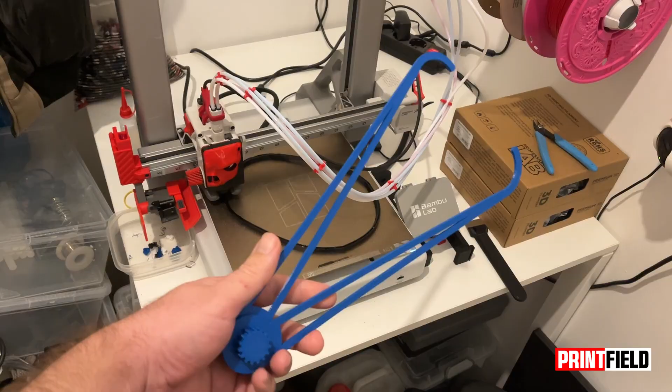Here is what to do if you're having problems scaling helmets. First, you will need an outside caliper. You can download my design from MakerWorld, link in the description. You can print it out fast and easy.

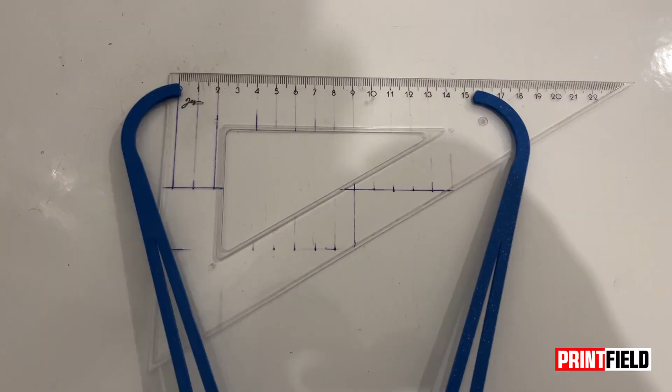With the caliper, you can measure your head dimensions. Simply open the caliper to see the width of your head, then carefully remove the caliper. Now we have the width of our head. With any kind of measuring instrument, simply measure the width that the caliper holds. My head's width is around 157 millimeters.

The next step is to download a dummy head. On MakerWorld, you will find a user called Budwin. At the user's files, you can find a dummy head pack. The pack has a few heads with different sizes. It doesn't matter, just pick one and download it.

After you downloaded the dummy head, load it into Bambu Studio. You will see a head like this. Click on the head to set it active, then click on the measure tool.

Now we are going to resize the dummy head how we measured our head with the outside caliper. We need to put down 2 points on the head. Try to find the same spot on both sides. I'm using the ear and the eyebrow as reference.

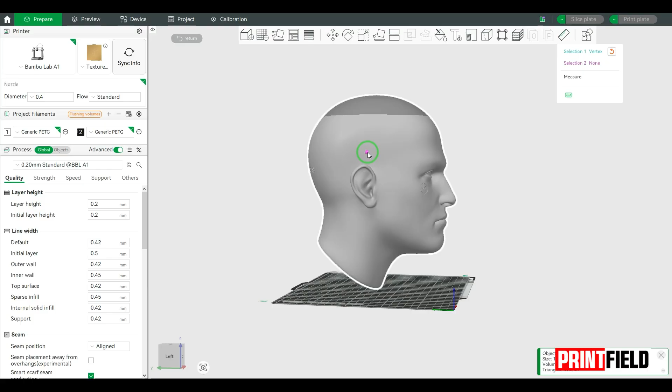Now you can see the actual size of the dummy head. What is gold in Bambu Studio is that you can change the size. Just simply click on the edit button and type in your head size that you measured. I measured 157 millimeters, type it in and press enter. The head will be scaled up to the size. Great, huh?

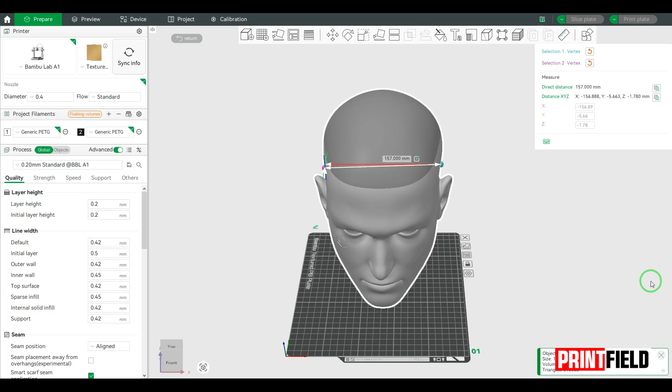Now the fun part. Drop in the helmet you want to resize to the perfect size. I always wanted a Batman helmet, so I will show you with this one.

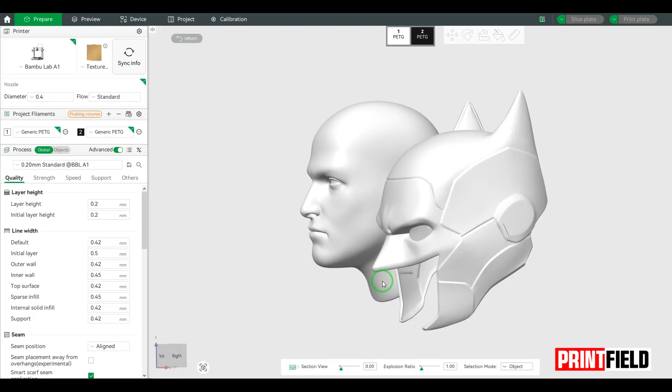There is an assembly view where we can move the objects easily. Click on that. We have the head in our size now. We need to move and scale the helmet to fit well on our head. Click on the helmet, then move it to the dummy head, how we want to wear it when it's printed out.

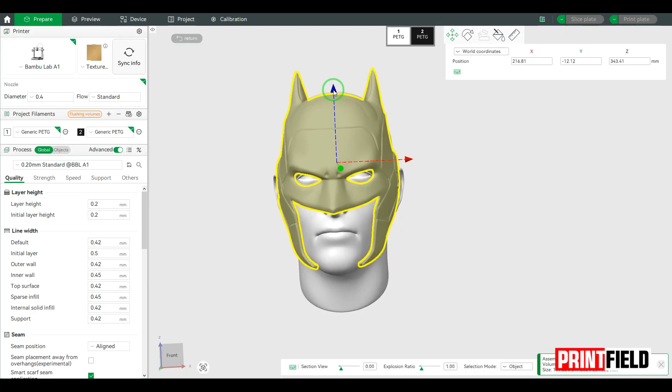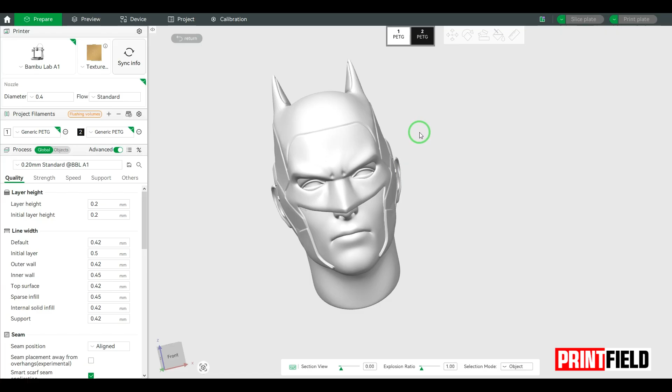In my case, as you can see, the dummy head is bigger than the helmet. The ears and the back of the dummy head are out from the helmet, so we need to scale it up. The nose is out and the chin is tight too. Press return and let's scale it up.

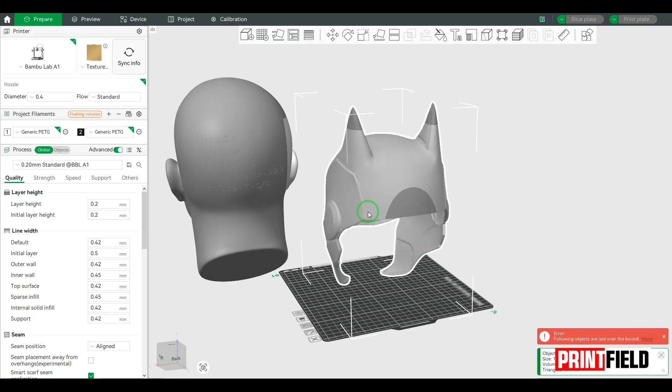You can put away the dummy head. Press the helmet to set it active, then we are going to use the measure tool again. On the same spots, click on both sides and we can see the actual size of the helmet that we can set.

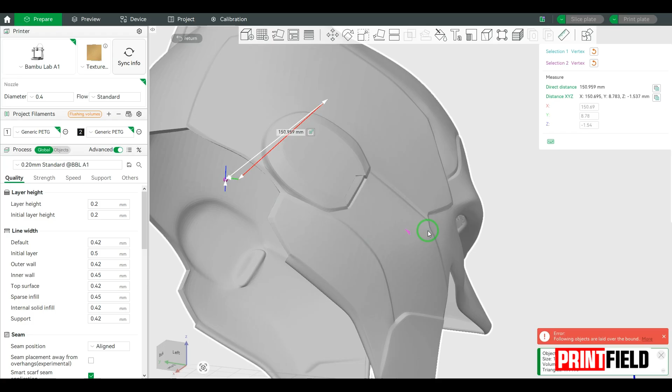In this case, it's way lower than it should be, so with the same process, edit the number. Give it a bigger size than your head size. If you want to put in foam or other materials, you might calculate those in too.

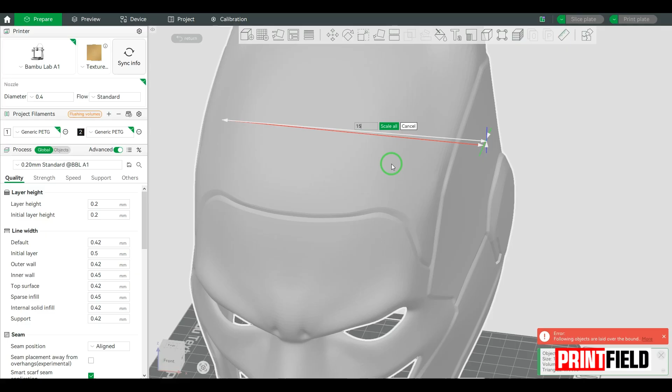The shape of any helmet can be different from your head shape, so we need to go back to the assembly view and we can see live how it would fit with the upscale. Now it looks much better, but still not perfect. We still need to scale a bit.

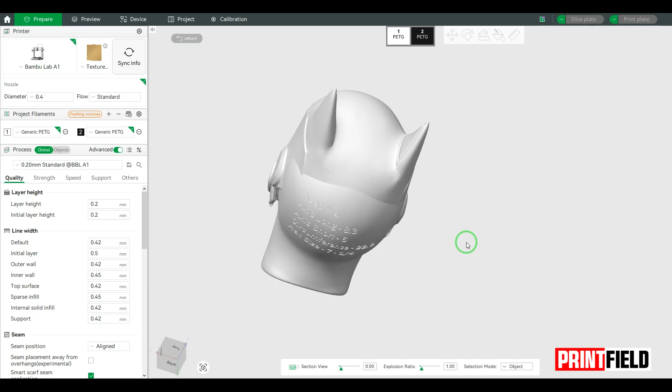So press return, then press the scale button. You can see that we are now at 5% up. And from now it's playtime with the percentages to make it perfect.

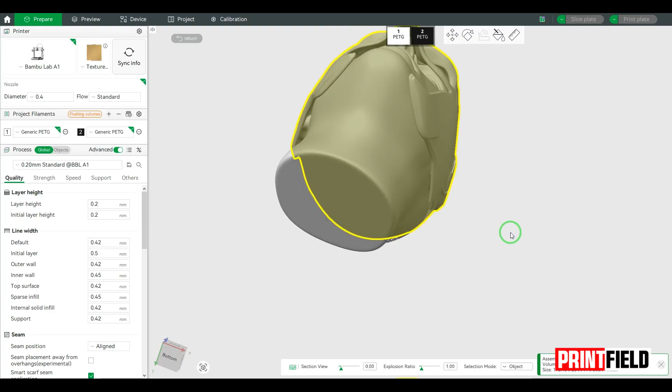After we gave in the bigger size, we go back to the assembly mode to check the fit to the head. It's bigger, but still not good. Let's give it a bigger scale.

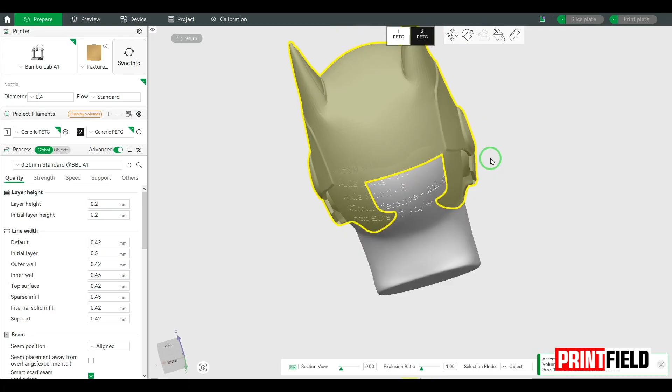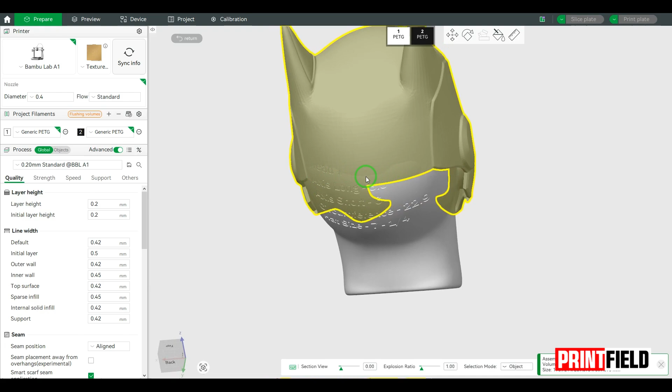We are now at 9% up, but there are still parts that aren't good. The face and the chin are quite good, but the back of the head is still out. We can return and give in more to make it bigger. Now look, the ears and the back of the head are in the helmet now.

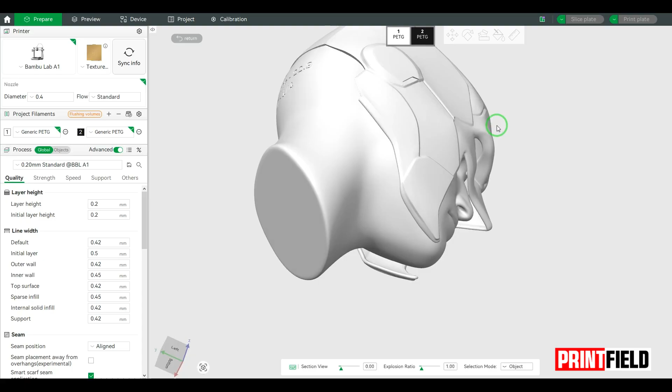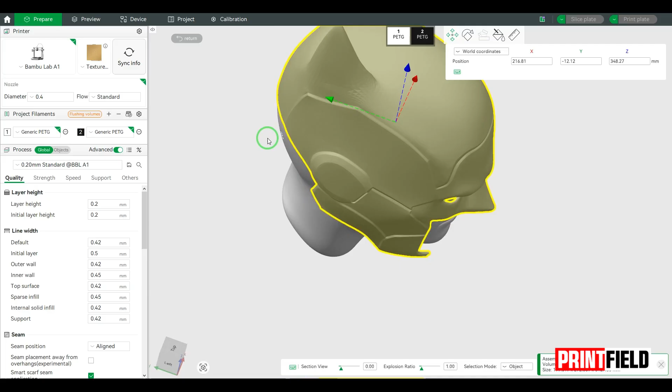We have some space in the front, so we need to move back the helmet on the head now. It's quite good, but don't forget that if you make a fully fit helmet, it will squeeze your head and your face will look like you're holding water in your mouth, and that won't give a cool effect. Also, if you plan to put foam in, you need to make it bigger to fit well.

Now this is the perfect fit. You can look around, watch the spaces, so you can decide if it's okay or if it needs more sizing. I'm planning to put in foam to make it comfy, so I will add 1% and I'm ready with the sizing.

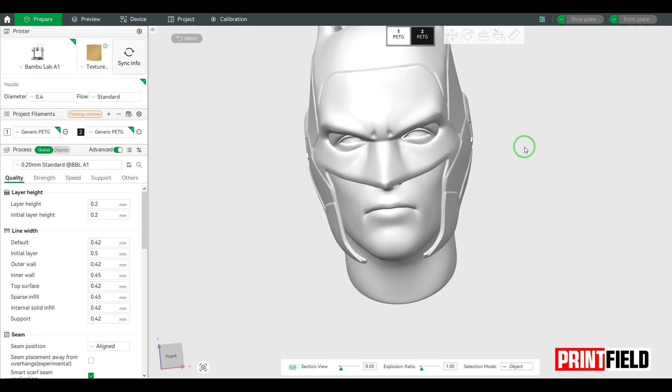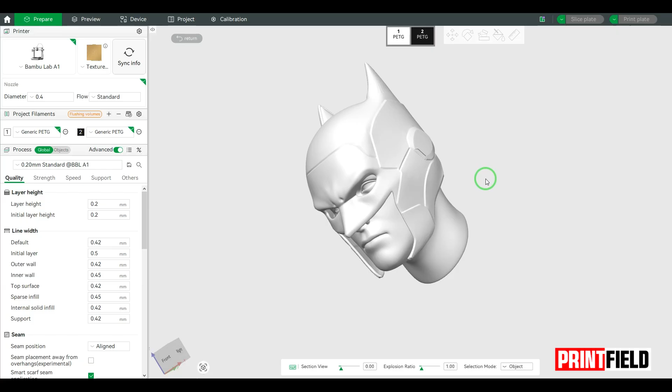Great, now we are almost ready for the printing. Now that it's bigger than my A1's bed, we need to cut it, but I don't want to make this too long, so I will skip this part. If you don't know how to do that, you can check my other tutorials about that.